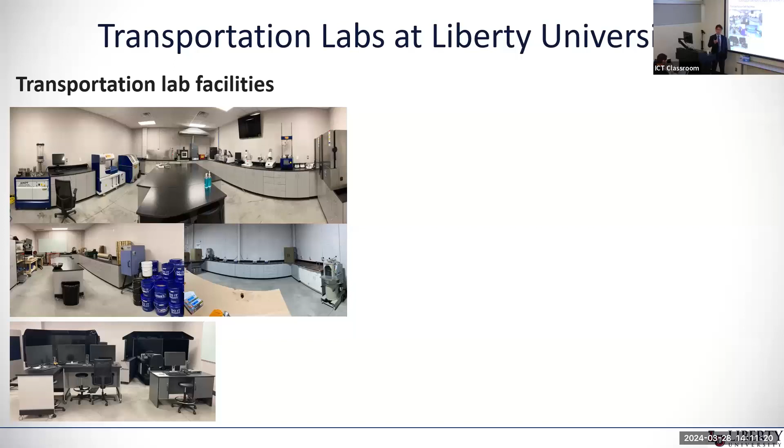The one on the right-hand side is for trucks, heavy vehicles, emergency vehicles, or buses, and we can run simulations with different setups on the traffic simulator. We also have four drones.

We use these drones to monitor traffic and get images of the pavement surface. One of the projects I'm working on now is using drone systems to detect water sources in underdeveloped countries. We send students over the summer to underdeveloped countries to help people find a good, clean water source. One of the challenges was how to find this water source.

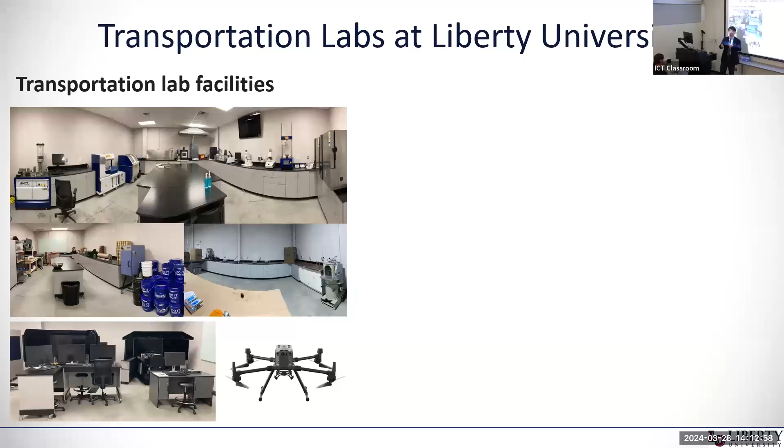The traditional way is to put electrodes on the ground to send signals to find the water source, but if you have a huge space it's really hard to find the potential point. So we use a thermal camera on the drone, flying over the land and measuring thermal data every 2 hours to see the temperature variation. Assuming there's a water source under the surface, the heating and cooling rate might be different from a dry area. We're not trying to detect the water source itself, but trying to narrow down the potential point to drill and find the water source.

My current research topic uses the asphalt facility, working on repurposing waste plastic as fibers in asphalt pavement. There's a dry process and a wet process. Using waste plastic as a modifier for binder, or as a replacement of fine aggregate in the dry process, has been investigated for a long time. But our approach is to use it as fibers, and I've been working on fiber reinforcement of asphalt pavement, to reinforce and improve the cracking resistance in asphalt pavement using waste plastic fibers.

So this is the autonomous vehicle traffic simulator. We figure out what is the impact of the autonomous vehicle at different automation levels and different penetration rates on the roadway in terms of traffic flow.

This one is for the pavement surface life. If you have the autonomous vehicle, it has a kind of limited wandering system, and we try to figure out whether this will extend the pavement surface life or damage the pavement faster. So we capture the location of the vehicles under human driving versus autonomous vehicle setups to see this data.

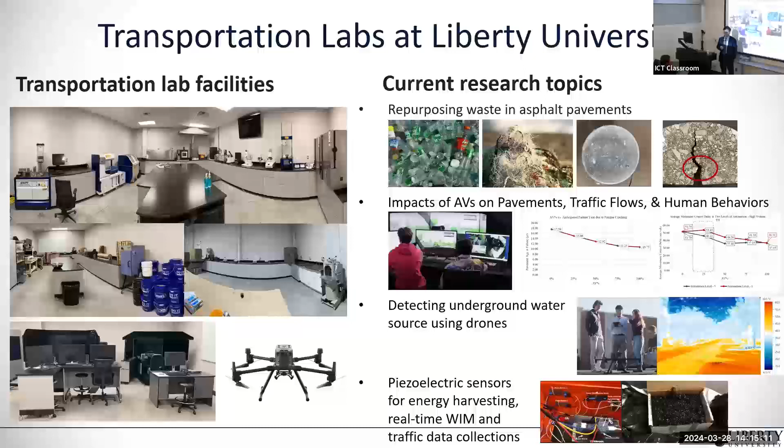So this is what we developed last year. Four electrical engineering students were involved in this project, and one computer science student developed code for how to actually collect this traffic data through this sensor and send it to the cloud service in real time, so we can check the types of vehicles.

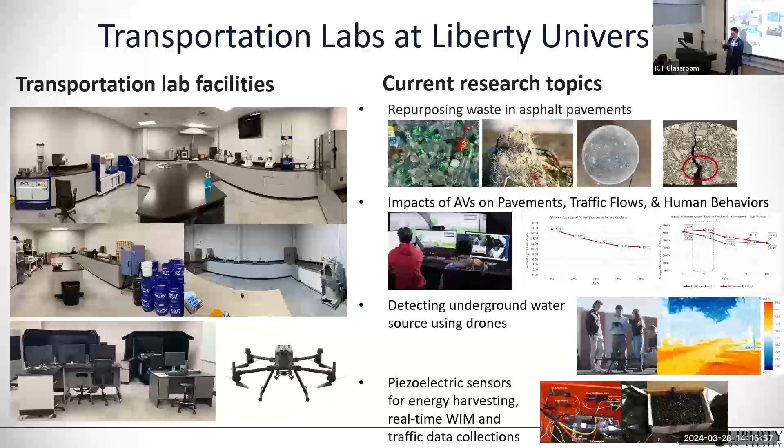Using this voltage change, we get the weight information, and based on the shape of this wave, we can categorize or classify the vehicle types in real time. So this is one of the ongoing projects.

Now I'm going to talk about the main research that we are doing at Liberty University. We try to repurpose plastic waste. Over 40 million tons of plastic waste in the US is produced, and at least 80% of this waste plastic is being sent to the landfill. Only a little less than 10% of the waste plastic is recycled.

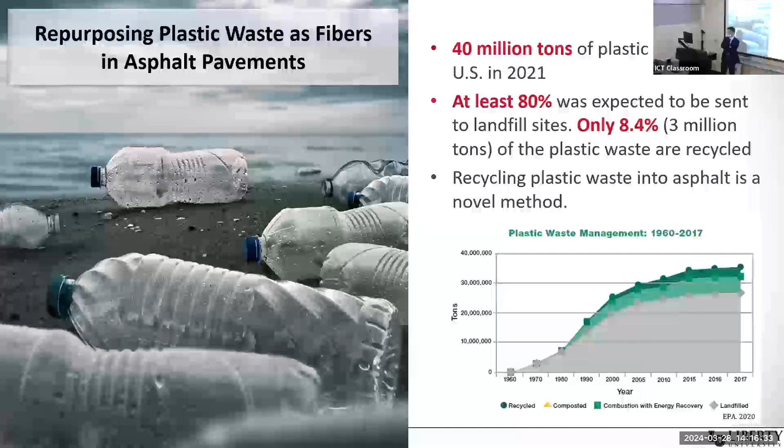We try to figure out how we can recycle this plastic waste. In the asphalt pavement industry, people try to use this as a dry process and a wet process. But there are pros and cons when we use this waste plastic in either the wet process or dry process.

If we use this waste plastic as a dry process, there's a challenge to determine the size of the plastic. If we use it as a wet process, there are segregation problems, and it's really hard to store in the plant for a long time because of the separation of these materials.

This shows the typical types of plastic waste: low density polyethylene, HDPE, PP, PVC, PET, PS, and nylon. They're organized by melting point and sources.

We try to look at the melting temperature because asphalt pavement materials are produced around 300 to 350 Fahrenheit. When we use waste plastic in the wet process, we have to choose materials that melt at the mixing temperature, but for the dry process, we pick types of plastic that have a higher melting point than the mixing temperature.

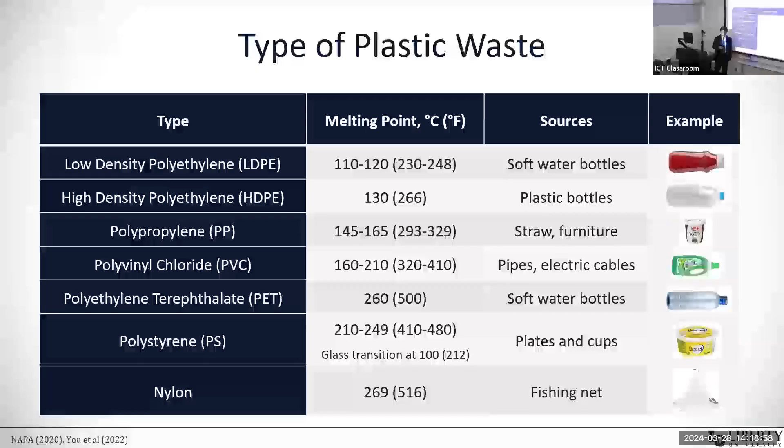We actually try to recycle waste water bottles for PET, and we also found there is a lot of ocean waste—fishing nets—that actually damage ocean animals and the ocean environment. So we try to recycle the fishing net; the material type of the fishing net is nylon. We try to use both of them as fiber to reinforce the cracking resistance of the asphalt pavement.

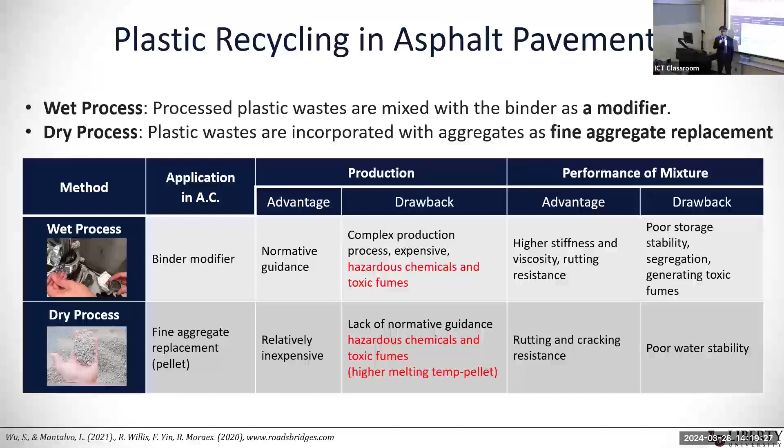As I explained earlier, we have two different types of processes to recycle plastic. But the common drawback of this production, or post-process of the recycled plastic, is it produces hazardous chemicals and toxic fumes, especially when you melt it to make the pellets used in the production of asphalt materials.

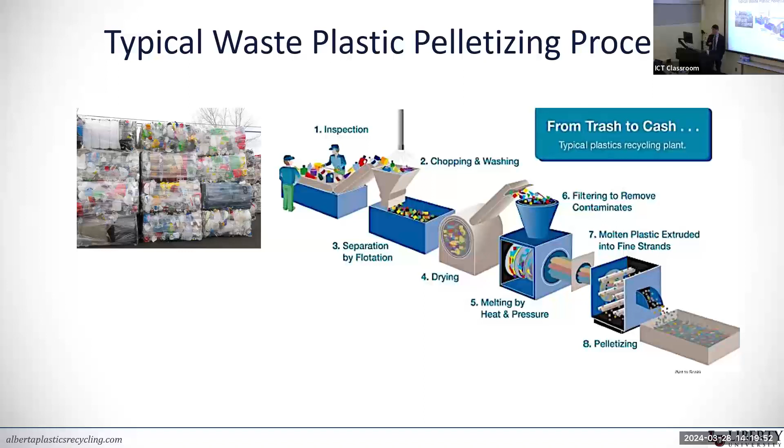Typically, the pelletizing process starts with collection, inspection, chopping, separation, and drying, then melting with heat and pressure, becoming molten, and going through this to make the pellets. The problem is these stages require a lot of energy consumption, and because it's melting the plastic at a higher temperature, it emits fumes. So even for the dry process, the most common application of waste plastic still goes through the pelletizing process to make the pellet.

Which has a higher melting temperature, the types of plastic used in the wet process? Both processes actually require the melting process to make pellet shapes, so we try to avoid this kind of step. Instead, what if we just chop it and make fiber shapes without the post-processing needed to make pellets?

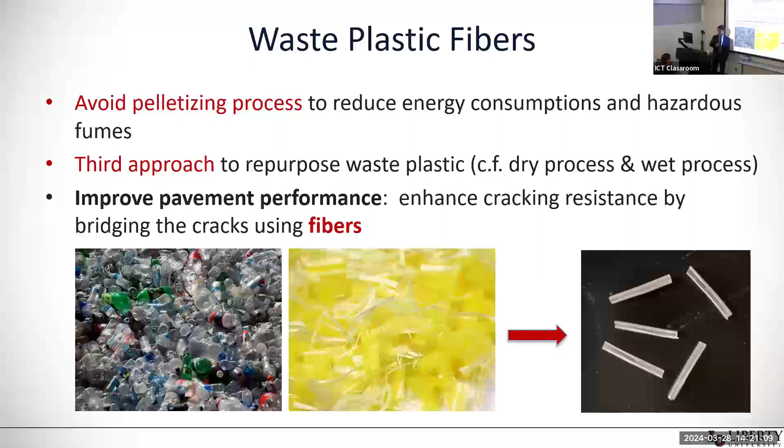One of the mixtures we had was fiber reinforced asphalt material. When we used aramid fibers, it improved the fracture energy by 57%. So there's a possibility to improve fracture energy by using fibers in asphalt materials. As you can see here, this fiber actually bridges the cracks when there's crack propagation, so we try to use these chopped fibers to bridge the cracks during crack propagation.

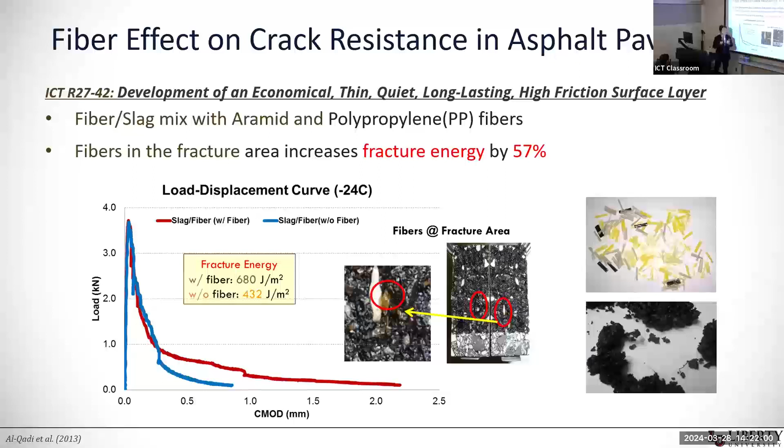The very first thing is selection of the types of plastic for fibers, based on the melting point. We took this PET plastic and fabricated it to make the 5 by 20 millimeter size, and also picked this nylon from fishing net. When you chop it, it looks a little different from the PET waste plastic, but we don't need to actually cut it by width.

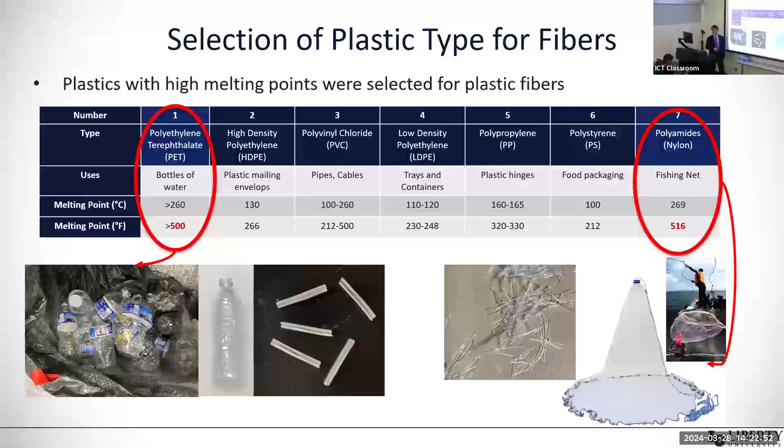We just cut this fishing net into 17 millimeter lengths, and then used these two different types of fibers in the asphalt mixture. This shows the scenario, the types of plastics, and the dimensions and contents.

We had a control mix without any fibers, and then PET with a thickness or width of 5 millimeters, 2 millimeters, and 8 millimeters with different thicknesses. We also had 3 different lengths of fibers from 10 to 13 millimeters, and various fiber contents to see the effect of different fiber contents on asphalt performance.

As you can see here, we fabricated this manually—we didn't use a shredder because it's really hard to control the shape. So over 10 undergraduates sat in the classroom and used this method. They had a hard time recycling some materials, and collected all these bottles from the dorms, huge bags of plastic bottles in the classroom, and then we had this kind of setup.

So we used this, and before putting this plastic into the asphalt mixture, we tried to figure out how it performs at different temperature levels and different levels of heat conditioning. We put the PET fiber into the oven and heated it for 8 hours, and even up to 24 hours, then applied a tension test.

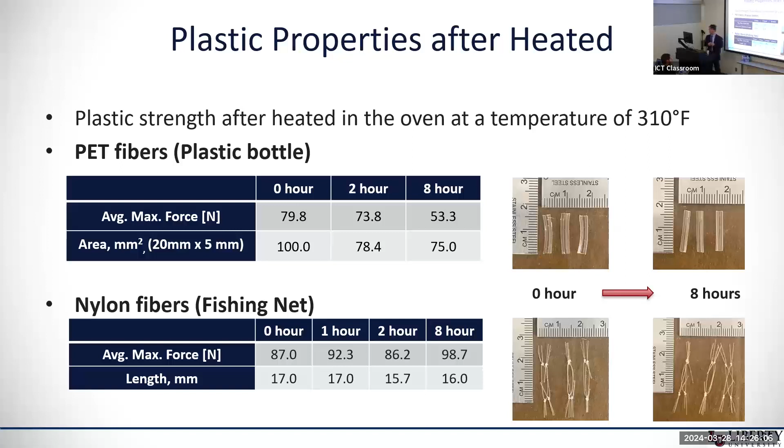We made the lab produced, lab compacted materials, and also sampled the materials from the plant, and compacted that one in the lab. So we have two sets of materials, and we set up 0.2, 0.4, 0.6% of the plastic, and then we ran the GMM test.

So this is the nylon fibers before we put this one into the mixture, and this is the PET fiber shape, and this is the lab produced, lab compacted materials.

What we did is we put the fibers in during the process - we poured this aggregate into the bucket, and then put the fibers in, and mixed before we put the binder on it, to make sure this fiber is well distributed before we add the binders.

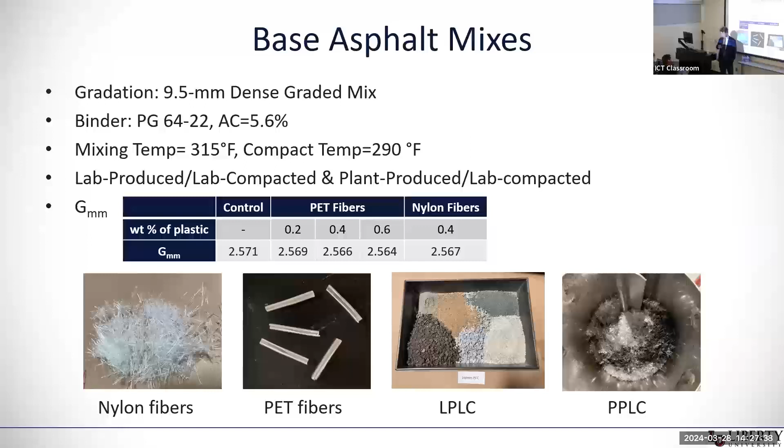For this plant produced one, we had to just put the fibers into this pre-blended material. Then we blended thoroughly.

So we compacted it to 160 millimeters in height to make the SCB samples, and then cut it in half, and put it into the environment chamber to condition at 3 different temperatures: 25, 1, and minus 12 degrees Celsius.

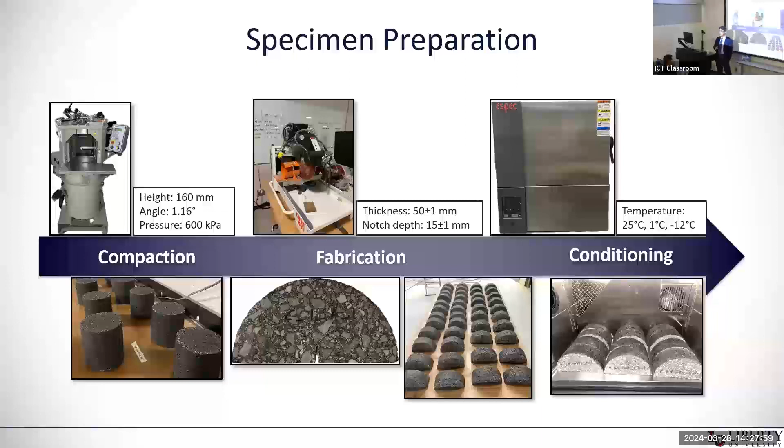We ran the test in the AMPT machine that we have. For the 25 degree Celsius test, we used a 50 millimeter thickness specimen with load line displacement control, and the loading rate we used is 50 millimeter per minute according to the I-FIT specifications. We look at the fracture energy, GF, and the flexibility index.

Same for the 1 degree Celsius test, and we tried to keep the same thickness of the specimen to minimize the geometry dependency of the fracture energy. We applied a 2 millimeter per minute loading rate, and we look at the same fracture energy and the flexibility index.

For minus 12 degrees C, there is AASHTO T394, which is the standard SCB fracture test at low temperature. That's why we picked minus 12, since we use PG64-22, and 10 degrees above this lowest temperature - the lowest high temperature, 22. That's the lowest temperature we use.

But this standard uses 25 millimeter thickness in the specimen - to be consistent, we used the 50 millimeter thickness specimen.

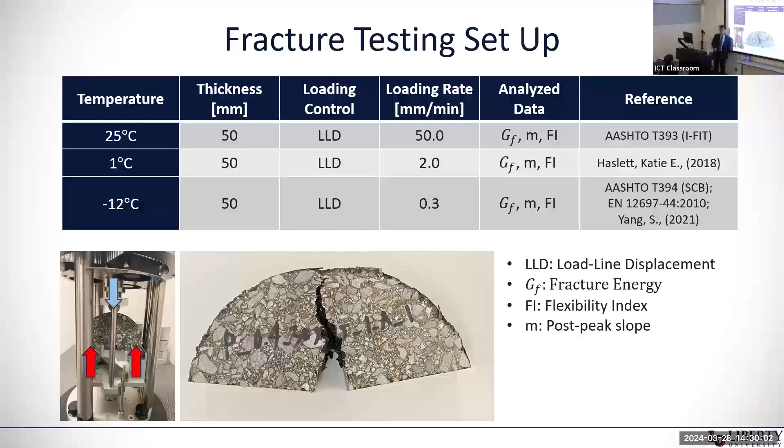And then for the loading rate, we started from a very slow loading rate to a high loading rate, but this specification uses CMOD control, which actually gives the kind of crack propagation. But if you apply the LLD control test at low temperature, it's really hard to control gradual propagation of the cracks. So we had some trial and error, and decided to use 0.3 millimeter per minute load line displacement control.

We look at the peak load, fracture energy, and the flexibility index as well, to figure out what is the impact of these fibers on the asphalt cracking performance.

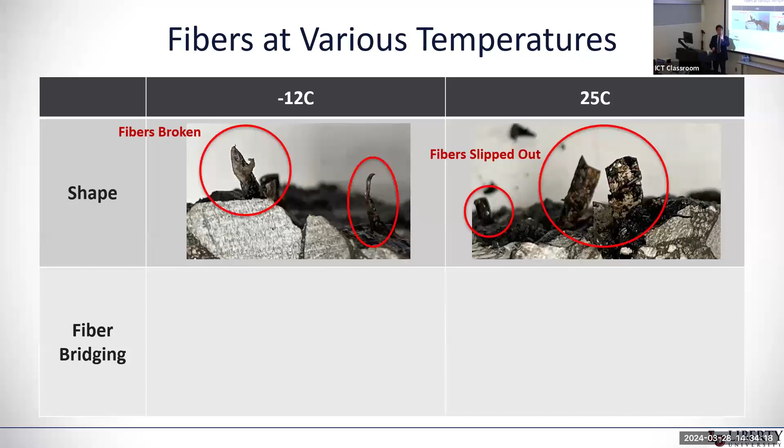That's why at the higher temperatures the effect of this fiber was not very pronounced or visible, although it improved the fracture energy in a certain way.

Also look at this surface again, and you see the aggregate was broken at low temperature as the crack propagated, and you see these fibers showing breakage. Also at high temperature, you see a lot of the fibers kept their original shape after crack propagation was done.

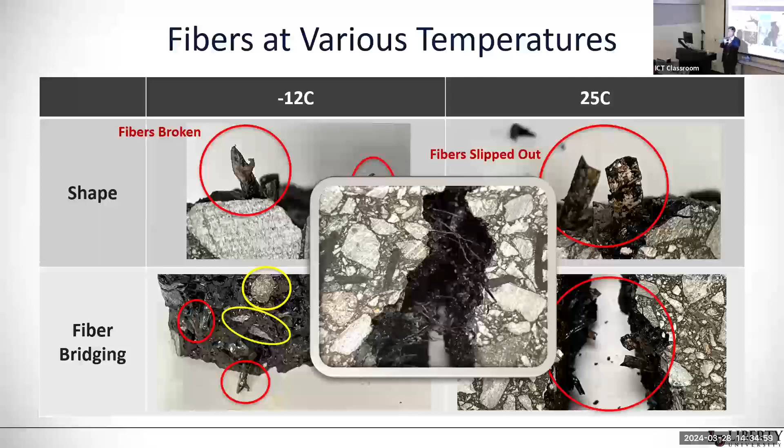Okay, so this shows the nylon fibers. It looks very hairy type, so we have a lot of fibers on it. So now dimension versus fracture energy.

As you see here, as we increase the length by keeping the width of the fiber at 5 millimeters, and increase the length of the fiber from 10, 20, and 30, and then put it into the mixture, it shows that as we increase the length of the fiber, it actually increases the fracture energy. This means the longer fiber can resist crack propagation better than the short fibers.

And then we did the same thing, keeping the length of the fiber at 20, and increasing the width of the fiber from 2, 5, and 8. But you don't see a continuous increase this time, because if you increase the width, it actually decreases the aspect ratio of the fiber. So as you have a wider and wider fiber, it actually creates a weaker surface more and more. That's what we found.

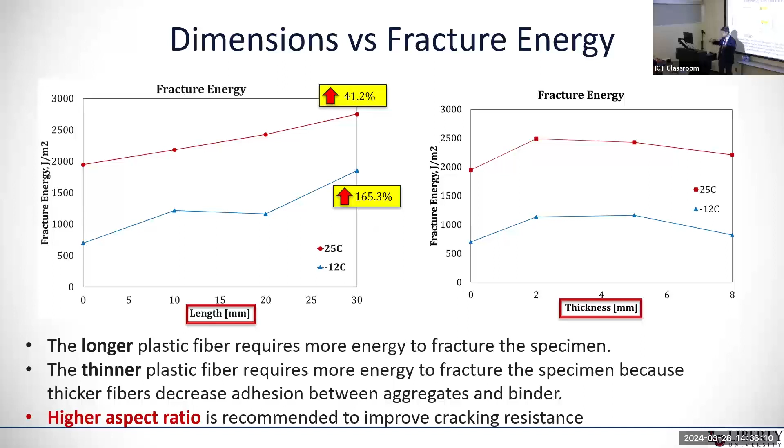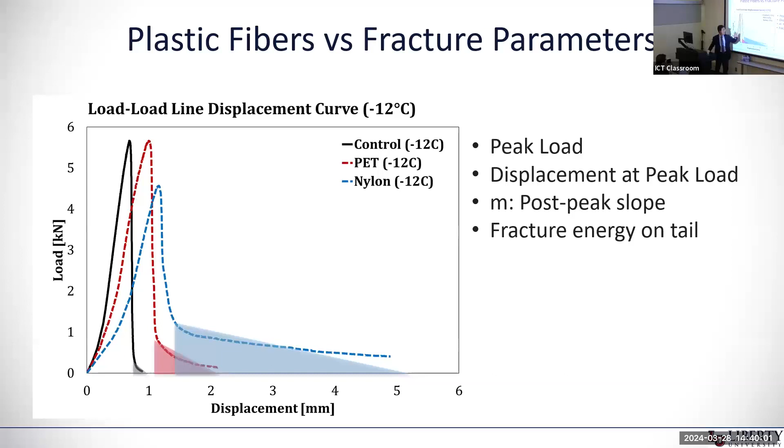When you use nylon, it drops the peak load, but it improves crack resistance capability after the peak load. Compared to the PET fiber, nylon fibers show higher fracture energy when used in asphalt pavements, but so far we've only used one content and one type of nylon.

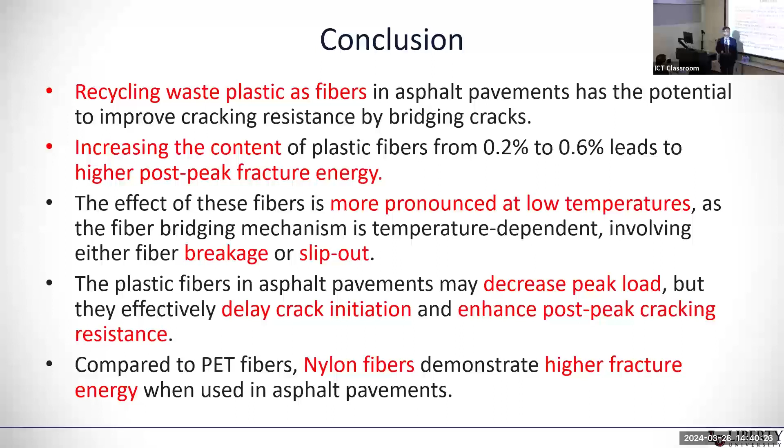What we are going to do is look at different sources of fishing net. Probably we'll use a brand new fishing net, which costs about $20 on Amazon, and chop it up. So this is new nylon.

But the next step, we're going to actually collect waste fishing net, which is old waste, and there will probably be a different reaction to the sodiums. So we're going to try to use real waste nylon in the pavement to see how it performs.

Also, fiber shape and volume fraction are important. One of my PhD students is working with a professor in materials science, and we're trying to determine the optimum volume fraction of the fiber and the right dimension of the fiber, using a self-consistent mathematical model. This model has been used in materials science for a long time, and we try to use it to determine the volume fraction of fibers that performs best.

Dispersion and plant application has been an issue whenever we use fibers. I remember 10 or 15 years ago, when we produced this fiber reinforced asphalt concrete and put it into the Chicago area, it was really hard to produce in the plant.

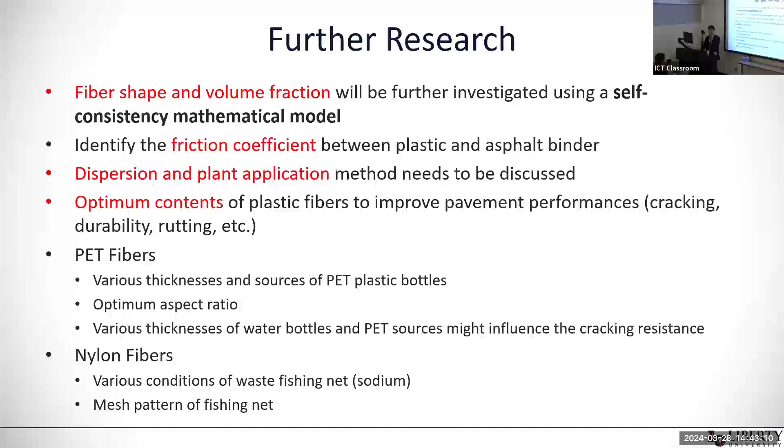For the optimum nylon fibers, as I said, different types of fishing net have different mesh patterns. We try to figure out the different meshing patterns and use them in the asphalt, to see how the mesh pattern affects the cracking resistance improvement in our research.

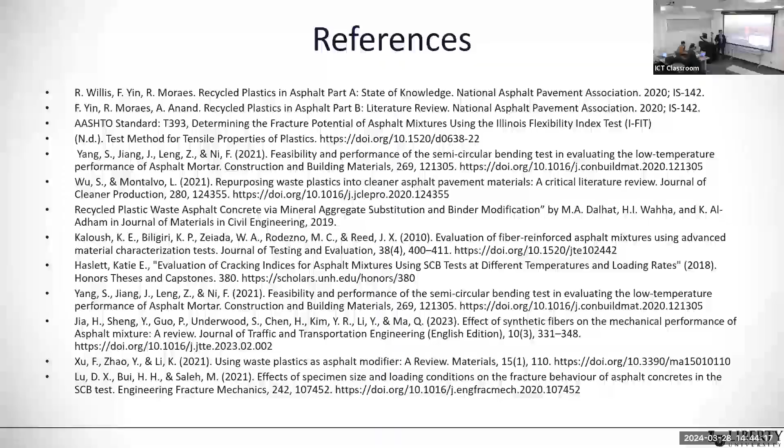It was interesting—it seems at 25C the nylon had much better fracture energy than PET, but FI was actually lower at 25C, which at intermediate temperature seems to me indicates a very brittle material, because it's actually reaching the peak and then having a very steep slope as it decreases. I also noticed your Cantabro results showed the worst performance for that one, which is also a room temperature test.

So it seems at room temperature, this one is having some kind of brittleness, losing its flexibility, and also having raveling problems. I was thinking maybe the binder content is low in this mix. Did you try any redesign or look at that?

For now, we didn't touch any mix design yet. The next step is we're going to look at the VMA and the volumetrics to see, as we add more and more dry materials like fibers, they create more surface area. Definitely we need to consider adding more binder. But when you use these aramid fibers, they said we don't need to touch the volumetric or mix design since it's a small amount of fibers. But at 0.4%, it seems like we need to touch the binder contents as well because it makes the material drier when we add these fibers. That's the point, yeah.

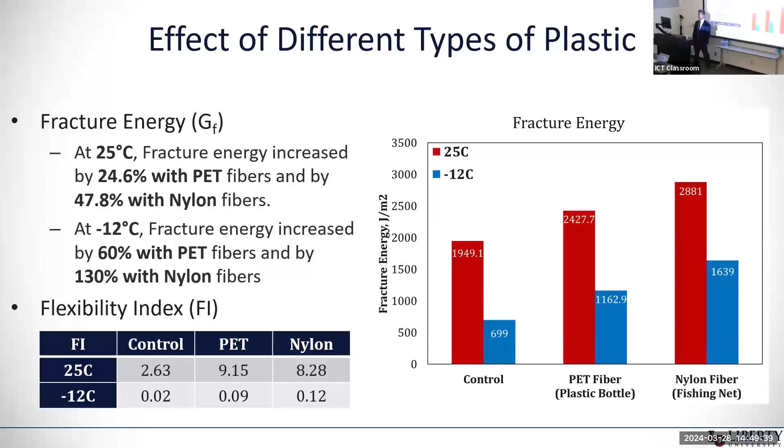Can you go to the slides of the fiber failure for the low temperature? Which slide? Next slide. Yes, this slide.

Yeah, that's a good question. What the student is doing this week and next week is try to see the friction between the binder and the fiber at different temperatures. We couldn't find the specification for that. What we're going to do is have tubes, fill the binder in it, and then put the fibers in. Then we put it at different temperatures and pull it to see the friction between the binder and fibers. That will explain what's the governing factor that makes the fiber break at different temperatures, or probably the type of binder may affect this, or types of fiber also affect it.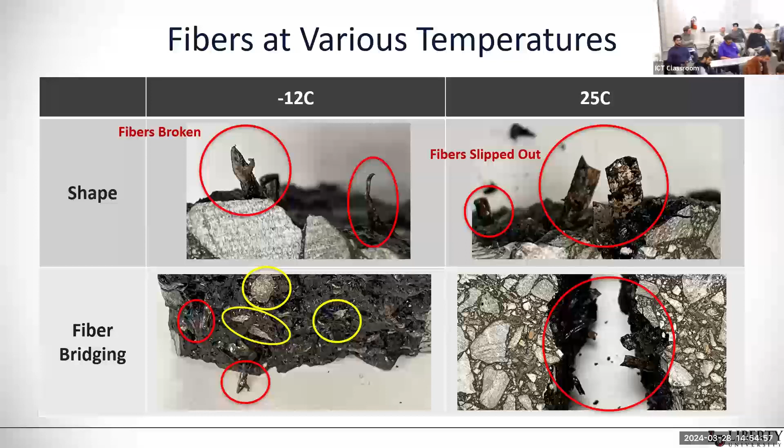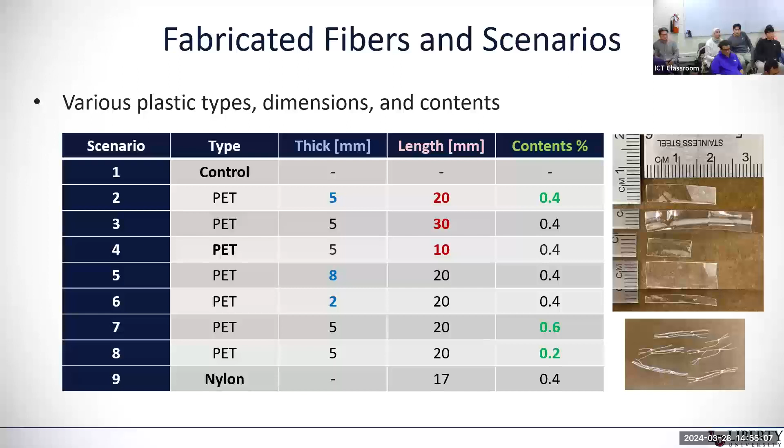Just a follow-up - I think a simpler way to think about this is if we go back to the glass transition temperature slide we showed earlier. The more we go with low temperature, the more we're reaching the glass state, where the elastomer is changing to be more rigid, or more glassy, and that explains why the fiber is broken.

So PET has a glass transition - certain types of plastic have lower glass transition points. That's why the PET changed its properties over temperature, while nylon didn't change its properties at different temperatures. This shows that although neither is melting at that temperature, if the temperature is near the glass transition temperature, it may change the property of the plastic.

Yes, glass transition temperature is also important - sorry. So you heated the plastics to 310? Is there a reason why you picked this temperature? It's kind of the range of the mixing and compaction temperature - in Fahrenheit. So if you put the fibers in and mix it, the drum mixer has this temperature, and we keep this in the silo, so it will change shape when we store it in the silo.